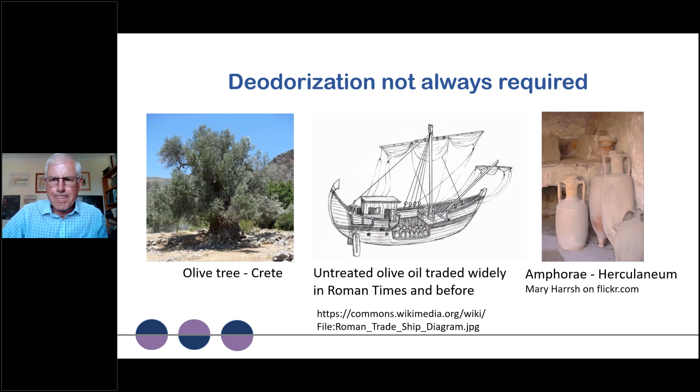Now I see a question here, deodorizing without degumming. I think what I'd say about deodorizing without degumming is really you've got to get the phosphorus level of the oil down to some degree, and if you didn't remove enough phospholipids, phosphorus from the oil, then they would all char inside the deodorizer, and you wouldn't be in good shape at all.

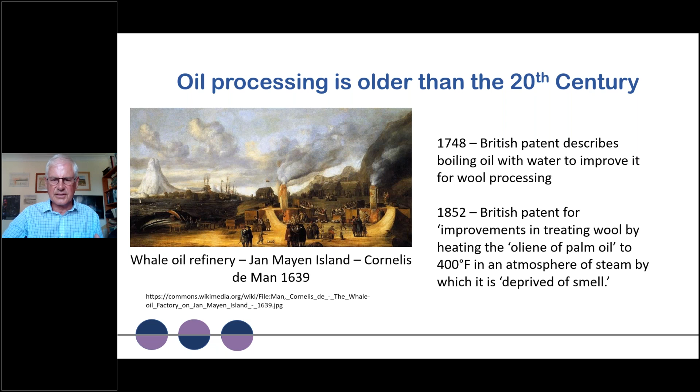And the problem with batch processing like this is that it's not just a very low production rate. You might only do 10 or 20 tons per batch, maybe 3 or 4 batches a day, but it's very, very expensive. You're using a lot of steam injection, there's no heat recovery, and you've got a lot of steam that has to be handled by the vacuum set, so you need a very big vacuum set, very large heating. It's a very inefficient process, but the quality of oil you can produce from this process is surprisingly good.

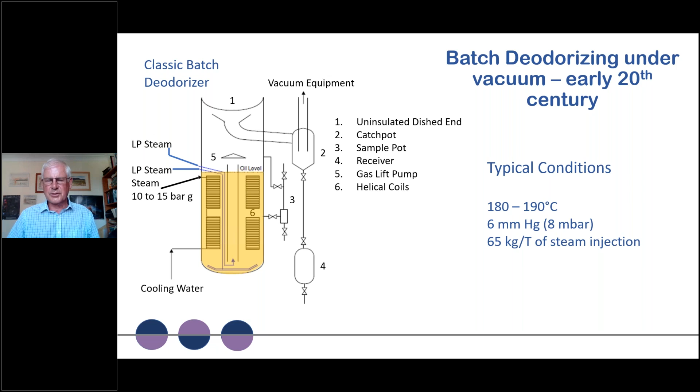So I'm seeing another question coming up in the question box here: would degumming still be necessary?

Well, yes. Generally speaking, you need some level of degumming. If you're starting off with soybean oil, you could easily have 1,000 parts per million of phosphorus in crude soybean oil, and you want to get that down well into single figures before you could even begin to consider deodorizing it. We've often set a limit of 3 parts per million for the phosphorus level in the oil before it goes into the deodorizer. Preferably you'd want lower than that, but I have seen a plant get away with 5 or more. You certainly couldn't come in with 100 -- it wouldn't be possible at all.

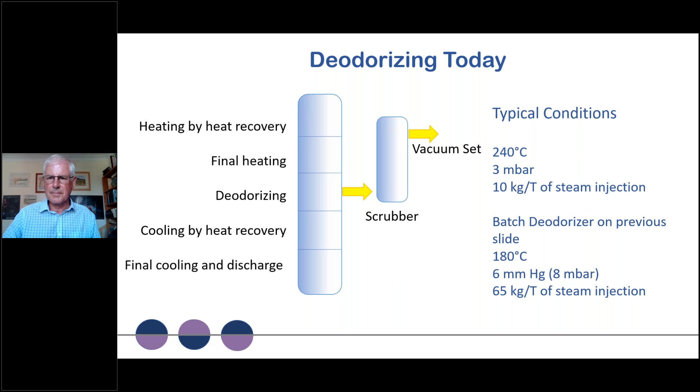Now it's important to understand -- oh, that's another question. Is it not phosphorus removal? No. So yes. Oh, I'm guessing -- oh, I've got more questions. No, degumming was, yeah. So yeah, I'm struggling here to see all of them.

Somebody's asking here, if we used a much higher vacuum, say 0.1 millibar, could we avoid the need to degum the oil? I would say, well, no, I don't think that would be workable. The phospholipids, which effectively are the gums, are not very volatile, so you can't really remove them by evaporation. And there are also other reasons why you wouldn't want to go down to such a low deodorizing pressure, because it would be uneconomical to do that.

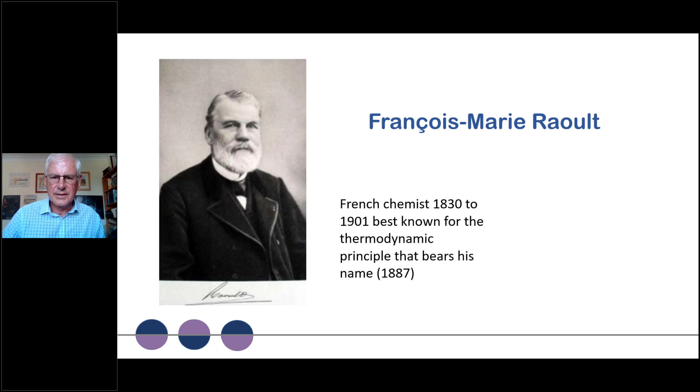One of the things you have to understand about deodorizing is the principle established in 1887 by François-Marie Raoult, the French chemist, often known in English as Raoult's law. Now, basically what that says is, if you've got a substance dissolved in another, then it only exerts a vapor pressure proportional to the concentration of that substance.

And apart from fatty acid, all of the other components present in oil that we're trying to remove are present in very low levels indeed.

Some things we're trying to remove, like glycidyl esters, are present in parts per million. A glycidyl ester at say 1 part per million is only exerting a vapor pressure in the region of 10 to the minus 4 millibars. So we're looking at removing substances with a vapor pressure far below the head pressure that's practical inside the deodorizer.

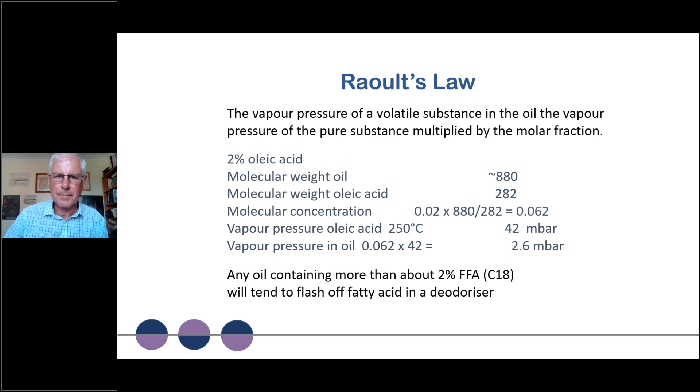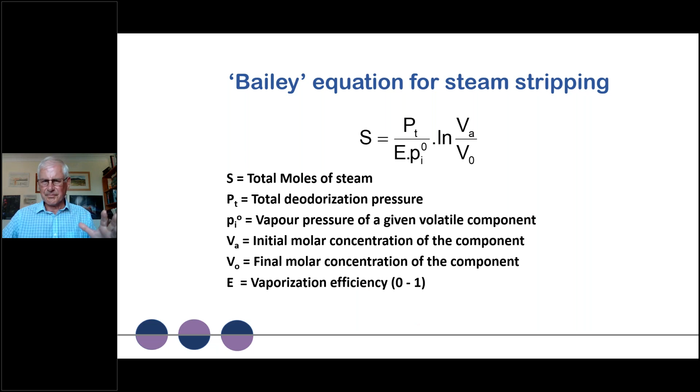I'm not going to go into this in detail, but the upshot is that in practical terms, the Bailey equation means the stripping is a function of the volume of steam used. This is important to remember - it's not just the pressure, and it's not just the mass of steam used, but a combination of those two things that really causes the stripping effect. If you use half the mass at half the pressure, this has about the same effect, as long as you're at constant temperature.

When it comes to stripping substances out of the oil - and more of this later - it's important to remember that the vapor pressure of things like fatty acid and tocopherol, and other substances we're trying to remove, approximately doubles for every 15 to 20 degrees C rise in temperature. So if we increase the temperature by 15 or 20 degrees, the steam required to strip the volatile substances out of the oil is cut by half.

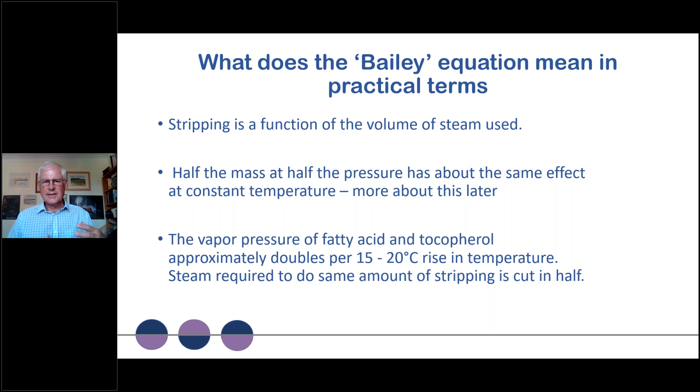From that point of view, we want to operate the process at as high a temperature as possible. But if we go too high, we'll start creating what are regarded as contaminants, such as trans fatty acids and glycidyl esters, which we want to avoid. So there has to be a compromise between these two effects.

It's instructive to look at the Votator deodorizer that was popular between the 1940s and the 1980s, also invented by the Mr. Bailey we heard about earlier. It basically consists of a series of batch deodorizers, one on top of the other, used for heating, deodorization, and water cooling. The oil sits in this box, known as a tray. There are pipes in the bottom with holes, and steam comes out of those holes, deodorizing the oil. Then it falls into this cooling tray and is cooled before being discharged.

How this used to work: you typically had a deodorizing time of around 60 minutes, a temperature of at least 250 degrees Celsius, 8 millibar, and 30 kilograms of steam per ton of oil.

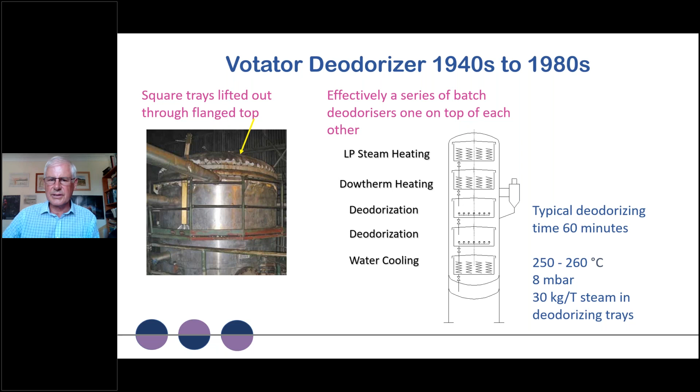Then in the 1970s, Votator introduced what they call the mammoth pump, a popular concept in deodorizing today - there's many different versions of it, also known as a gas lift pump. What happens here is there's a steam chest, a box with steam inside, with holes in the side. Steam comes out of these holes, rises up this tube, and oil rushes in to take the place of the steam. You get a mixture of steam and oil rushing up, hitting the deflector plate and getting deflected back into the oil, while the steam rises up, taking away the volatile material.

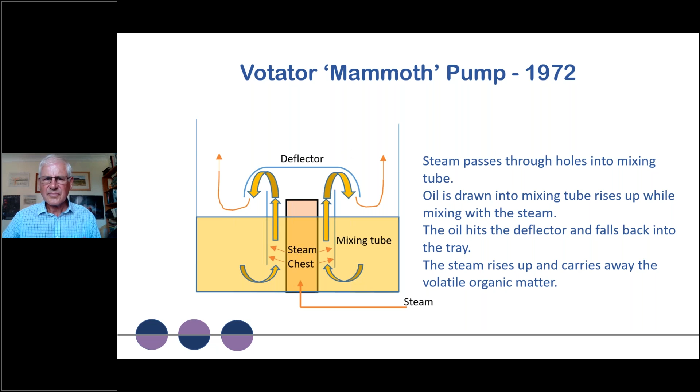I wondered for years whether Votator had actually invented the term mammoth pump, but it seems they certainly didn't. The mammoth pump was a term used for an airlift pump that was used to draw water out of mines, and the invention is said to date back to 1797. Here's a newspaper article dating from 1906 where the term mammoth pump is clearly used, so certainly Votator didn't invent it.

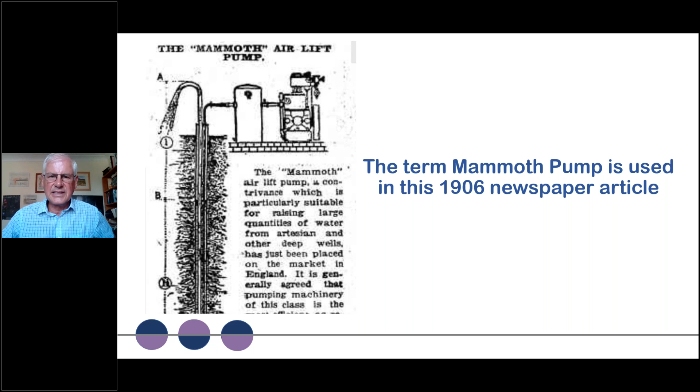But what we see here is that if you introduce the mammoth pump into the Votator deodorizer, this is what they did. Instead of 60 minutes that they had with just the pipes with holes in, they've got one deodorizing tray operating on a 15 to 20 minute cycle.

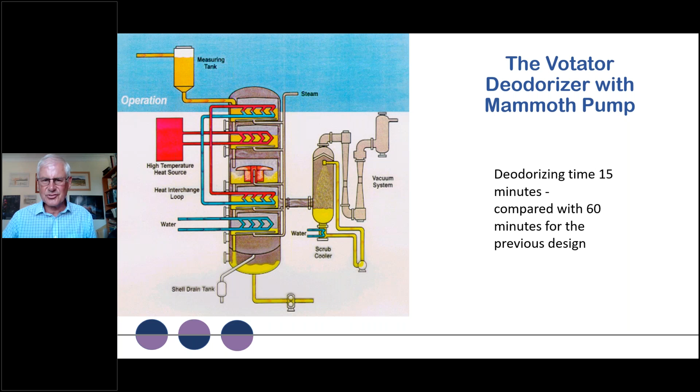So why is that? Now, I thought for years, and maybe you think too, that the mammoth pump is more efficient at mixing steam with the oil than just bubbling steam in through some pipes. But strangely enough, that doesn't seem to be the case.

If you look at the Votator design, and later designs that came along, like the Smet Unistock and the Kirschfeld deodorizer where you had just steam pipes involved, or you look at other designs which use mainly mammoth pumps, the way in which steam is mixed into the oil under industrial conditions, at least, and you may get a different result in the lab, this vaporization efficiency is virtually the same however you mix the steam into the oil.

And to me, that seems unlikely. But when I've looked into this and done some measurements in the field, and when people have gone into the lab and tried it as well, it seems that is true.

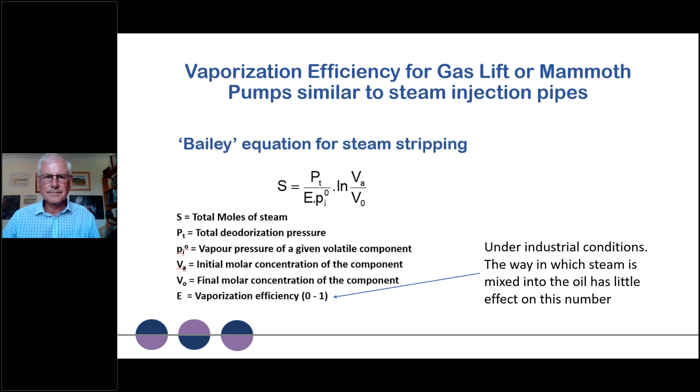So what is it about mammoth pumps that make them so desirable? What it means is, if you put 30 kilograms a ton of steam into the oil in a mammoth pump, you can get all the steam into the oil in only 15 minutes. Because you've got this huge surging oil coming up, but it's immediately deflected back, so all of the impact of the oil going upwards is deflected back downwards.

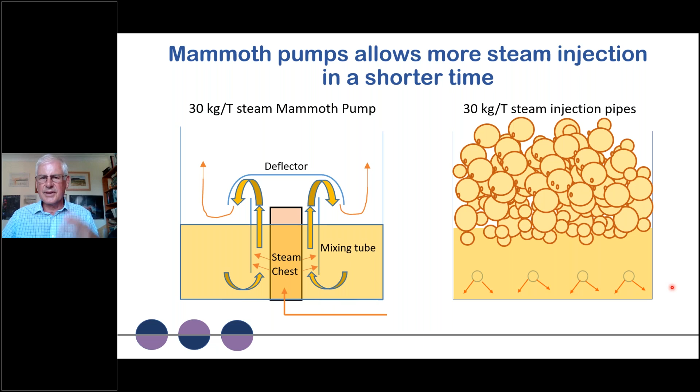But if you put the same amount of steam into a tray with steam injection pipes, it just all bubbles up and overflows. This deodorizer had square boxes inside a cylindrical column, so it would actually fall down to the bottom of the column, and you'd have a terrible mess.

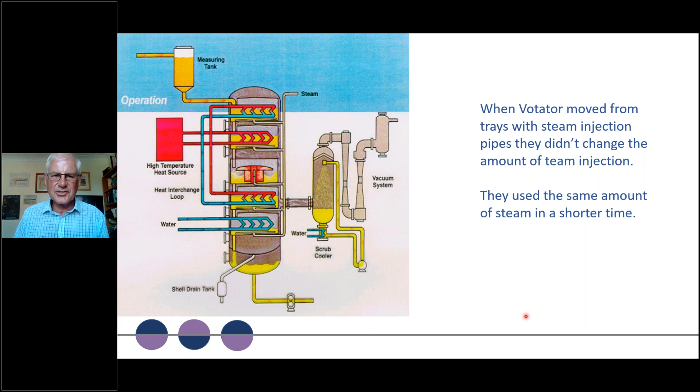So when Votator moved from trays with steam injection pipes, or sparge pipes as we sometimes call them, they didn't change the amount of steam they were putting in. They just used the same amount of steam, but in a shorter time.

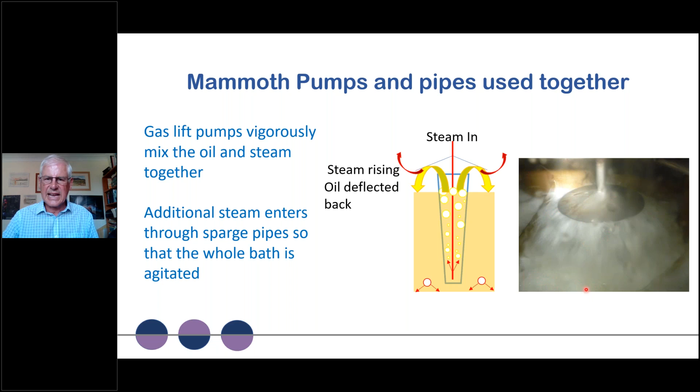And what you sometimes see today is mammoth pumps and sparge pipes, injection pipes, used together. This is a picture showing it happening. There's the steam coming in. This is the hat or deflector plate. Here's the oil being deflected off the top of the hat, and this is oil being agitated by these pipes below.

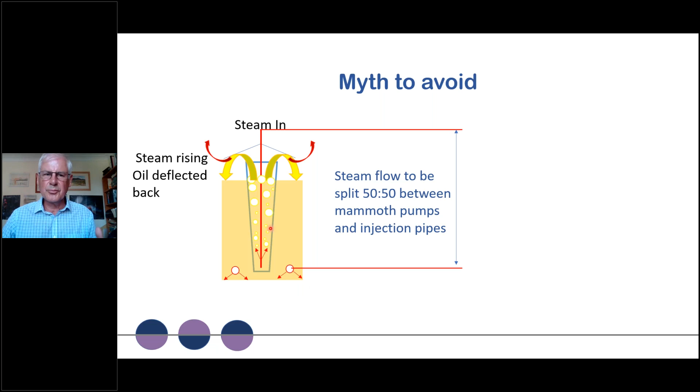Now here's a myth that I think you must avoid. It's often been said that if you have this arrangement, the steam should be split 50-50 between the mammoth pump and the injection pipes. But we've only just been hearing that a mammoth pump can put more steam into the oil than an injection pipe. So it doesn't make any sense to make these two the same. You can put far more steam into here than you can into here.

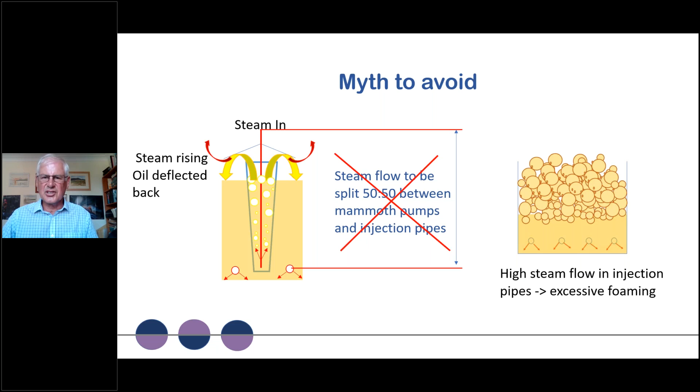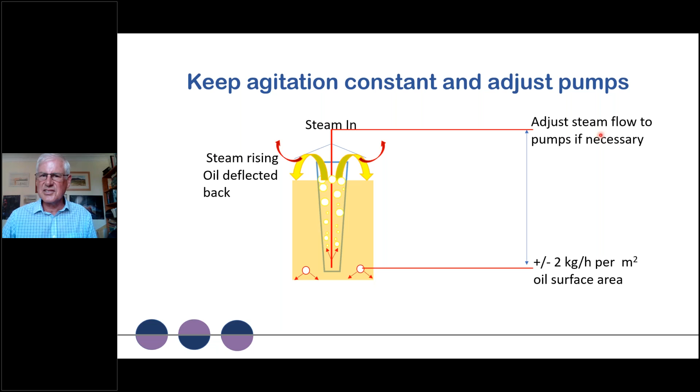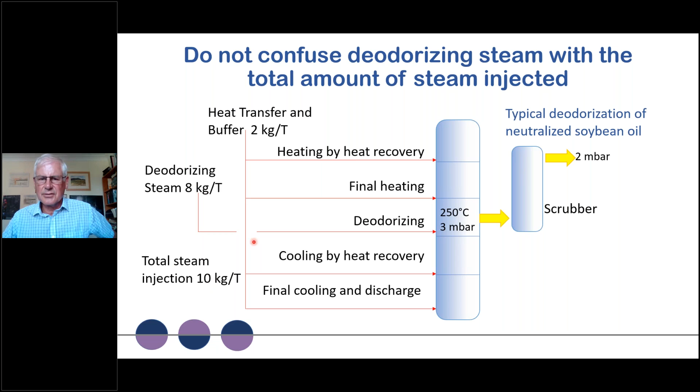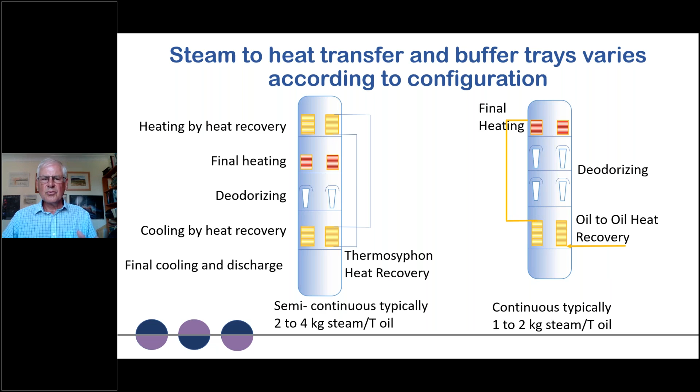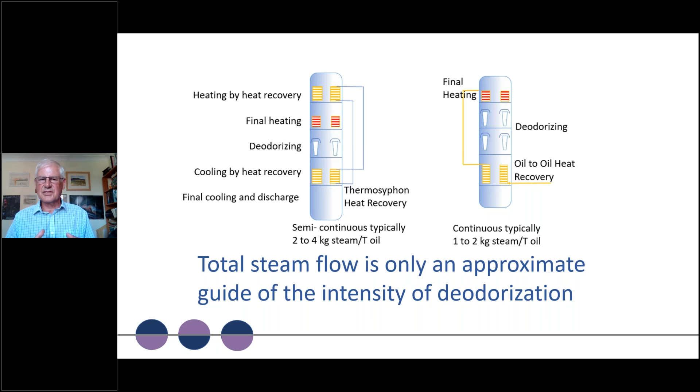Different types of deodorizer require different amounts of steam into the non-deodorizing tray. If you have a semi-continuous deodorizer, such as the Votator or one of the more recent designs, you easily have 2 to 4 kilos of steam per ton of oil. In a continuous deodorizer, where heat recovery is more compact, perhaps 1 to 2 kilograms a ton. So the total steam flow to a deodorizer is only an approximate guide to the intensity of deodorization. You really have to also consider how much steam is entering just the deodorizing trays.

Because if you're putting more steam in than you need to, that steam you could be using for deodorizing. And if, by adjusting the rate of steam to all your non-deodorizing trays, you could get 10% more steam into the deodorizing trays, then you could do 10% more deodorizing, and that could be really very significant.

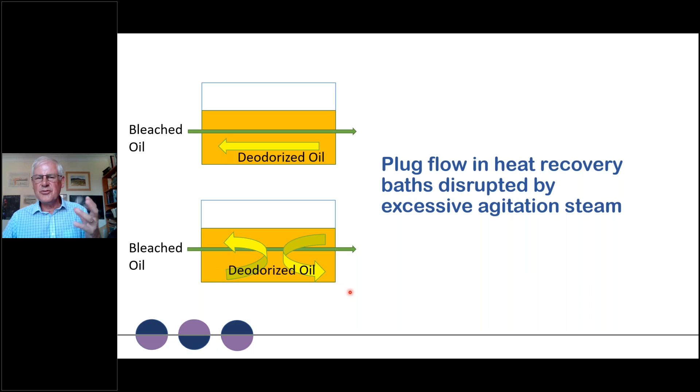Also, it's worth remembering that if you have a continuous deodorizer with bleached oil flowing in pipes and deodorized oil flowing in baths, if you put too much agitation steam into that system, you can disrupt the plug flow. So instead of a plug flow bath, you make it a mixed bath, and then you don't get any improvement in the heat recovery. In fact, it drags the heat recovery down. So by adding more steam, you've actually pulled down the heat recovery. So definitely something to avoid.

Deodorized lecithin using steam, of course. Well, yeah, perhaps we'll cover the matter of lecithin later. Basically, if you dry lecithin, some of the impurities are carried away with the steam as part of a drying process. So that's really something different—you're certainly not deodorizing lecithin in anything like the equipment we're talking about here.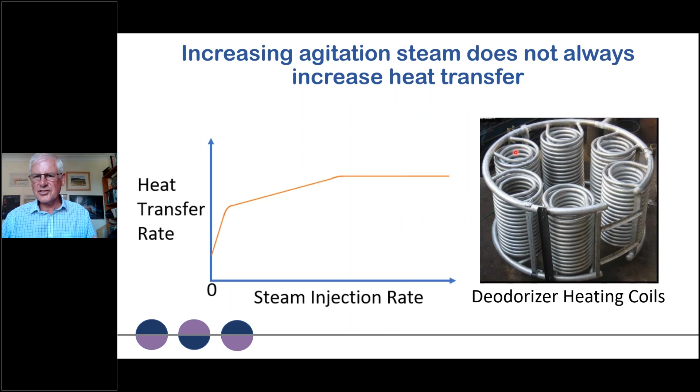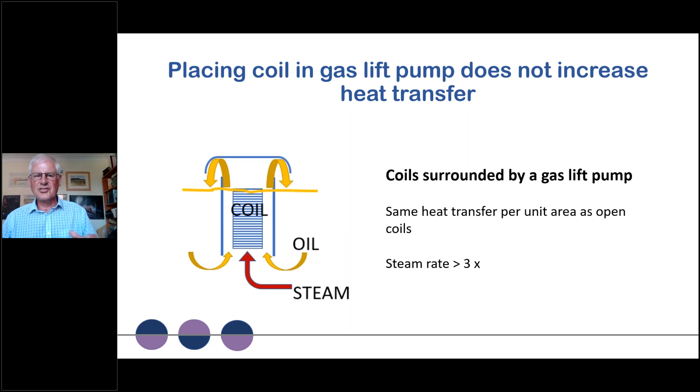So what's happening here is that the oil is being dragged through across this coil, but I have had the opportunity to measure the heat transfer rate in this kind of system, and it's virtually the same as if you had the coils just in an open bath with a sparge ring below them. So this looks encouraging, and it's hard to believe it doesn't work better than it does, but certainly the evidence I've seen suggests it's no better than just having open coils. But we've used 3 times the steam rate to do it, which is unfortunate.

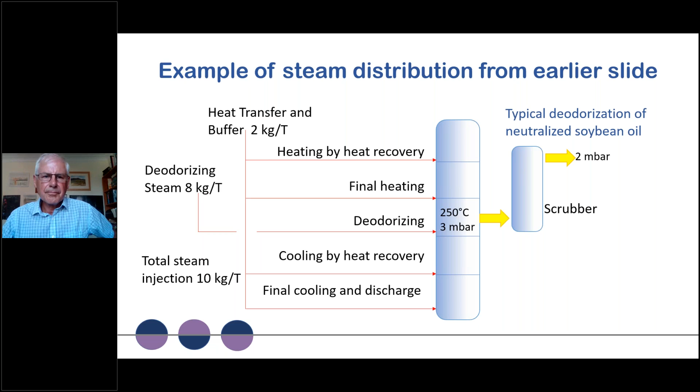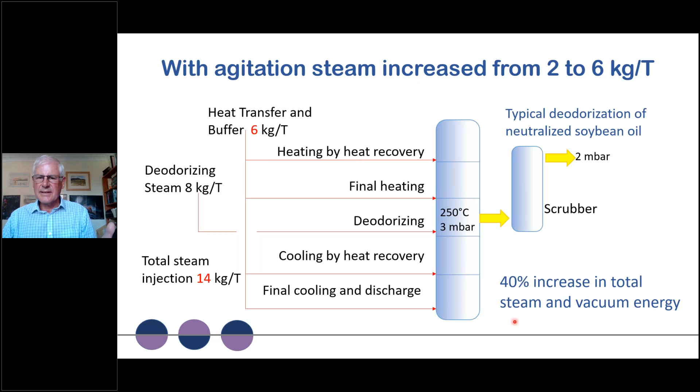So if you look at the example we had earlier, with 2 kilograms a ton of steam in the non-deodorizing trays and 8 kilograms of steam in the deodorizing trays, then if we say, well, with this coil in the gas lift pump, we need 6 kilograms a ton of steam for the heat transfer and buffer trays, the total steam goes up to 14 kilograms a ton. So we've needed a 40% increase in the energy required for the total steam and the vacuum energy.

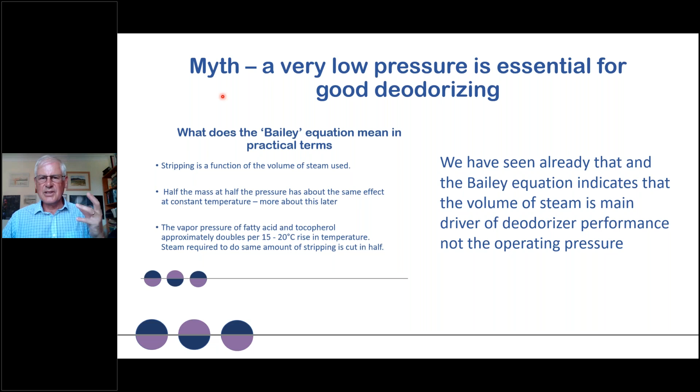Now, I'm going to say this is a myth, and not everyone will agree with me here, so I have to tread carefully. You don't actually need a very low pressure to get good deodorizing. It's a myth that a very low deodorizing pressure is essential for good deodorizing. The Bailey equation has already told us that the volume of steam, rather than the operating pressure, is essential.

In fact, even in the early 20th century, we can see that sometimes deodorization was done under atmospheric pressure, and theoretically that's okay, but practically it's hopeless because it's massively expensive and you need vast quantities of steam compared to doing it under vacuum. The Bailey equation says yes, you can deodorize at atmospheric pressure, but we don't recommend it.

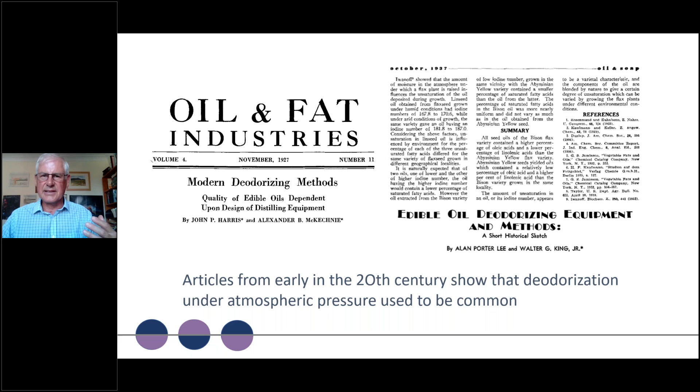So the message here—another question's appeared. No, I don't see it here.

Mammoth pumps require higher bed heights, which diminish the efficiency of sparging steam. What does that mean? Is it more efficient to use lower bed heights with only sparging steam? You might think so, and intuitively you'd think that's the case—that a shallow deodorizing tray would be more efficient than a very deep bed with the Mammoth pump in it. But when you actually try it, maybe with very sensitive measurements you'd see a difference, but in practical terms in industry, I can't see any difference that creates.

So what we have here is 3 millibar with 10 kilograms of steam. I'm going to say that in terms of the stripping of the oil and the quality of the oil you're going to get, you do just as well if you had about 20 kilograms per ton of steam. And in the 80s and 90s, nobody thought there was any problem with that at all.

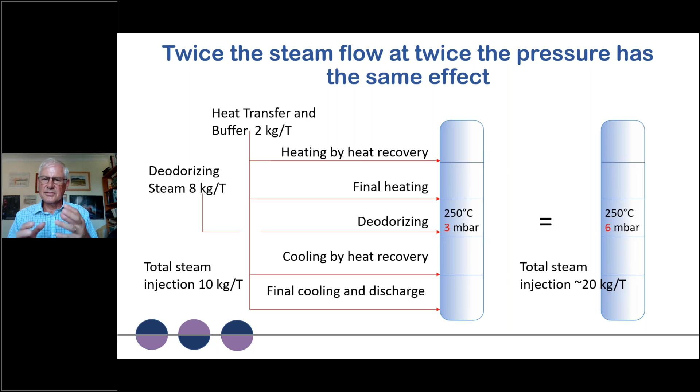But on the other hand, there's an argument that steam actually reacts with coloring bodies in the oil. Some people have said this, so having a higher mass flow rate of steam helps to reduce color. There's also an issue if you go very, very low in pressure, then condensing the volatile substances in the scrubber starts to become an issue.

But certainly you will always get at least some small degree of hydrolyzation, creation of fatty acid in the deodorizer. You have to try to minimize that by using the lowest possible temperature, making sure the steam is very dry when it goes in, because introducing droplets of water will certainly have a negative effect.

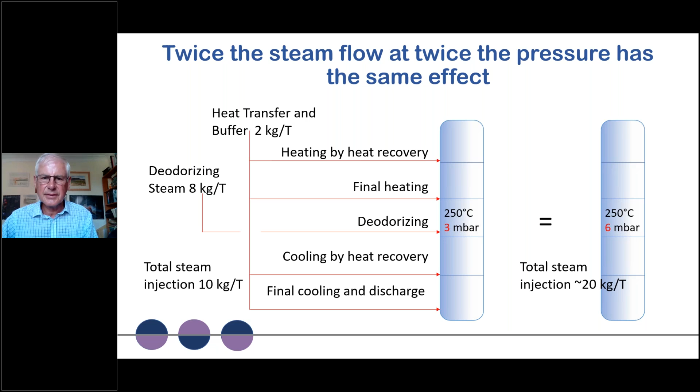Okay, shall I carry on? Got a lot of questions in here. I'm only getting a sort of preview, not seeing them very easily here. Pull out the box a little bit.

Is there any chance of more oil loss with higher temperature? Yeah, I think that's true.

You're more likely to create fatty acid and have that excess fatty acid stripped off at higher temperatures. And with higher temperatures you can generally increase the losses. So if you do more deodorizing, put more steam in, more temperature, more vacuum than you need, that's going to lead to more losses, either from fatty acid or from other things you didn't want to remove.

So if at the end of the day, instead of the distillate being 0.3% of the oil flow, it's 0.4%, that's 0.1% you aren't selling as oil. Maybe you can sell it as distillate, but whether you're getting enough extra margin out of that is perhaps questionable. So yeah, it is all a compromise.

You want the highest temperature possible that will reduce the steam flow and cut down the color, because a high temperature will reduce the oil color. So it's all a compromise, unfortunately, and there's no absolutely final result where you could say that's the perfect temperature. It depends on what your priorities are and where you might get to.

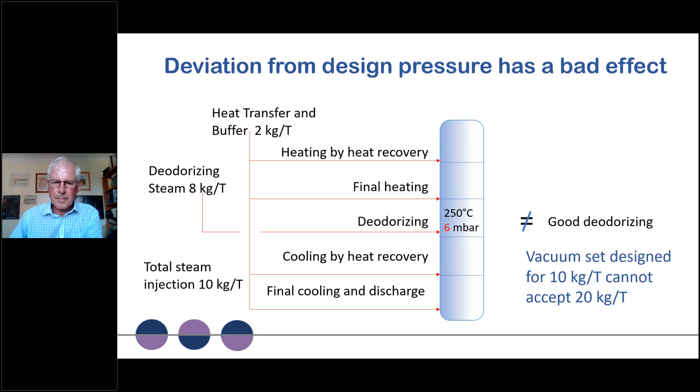Here are some principles I want to summarize: if you have a rise in pressure above the design level, then you're going to get an adverse effect on deodorizer performance. But if you have a higher design pressure combined with a proportionally higher steam flow, then you'll get the same stripping performance. And what pressure you choose is driven by the economics of the process.

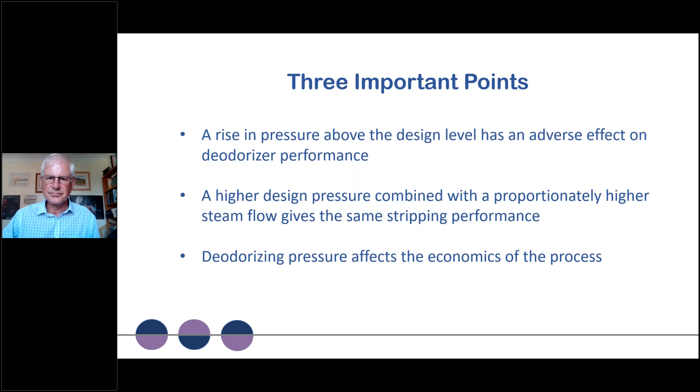Now, in deodorization, there are 2 commonly used forms of the vacuum system. There are vacuum systems based on steam jet ejectors with intermediate condensers, and these condensers can use either cooling tower or chilled water. There are also sublimating systems, where the steam freezes on the outside of tubes, which are maintained at around -30 degrees Celsius, usually by liquid ammonia. Then you have a small ejector set, or sometimes some dry pumps, to remove the rest of the non-condensables.

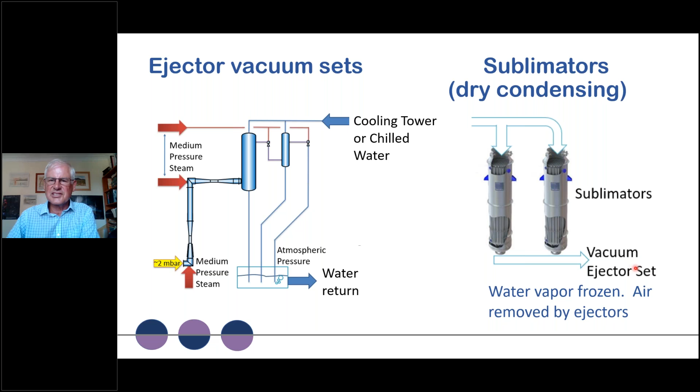The ideal deodorizer operating pressure is around 3 millibar, but if you go a little bit either side of that, it doesn't really make very much difference.

It's important to remember that, whatever pressure you choose, the sublimator is always going to be the most economical in terms of running costs.

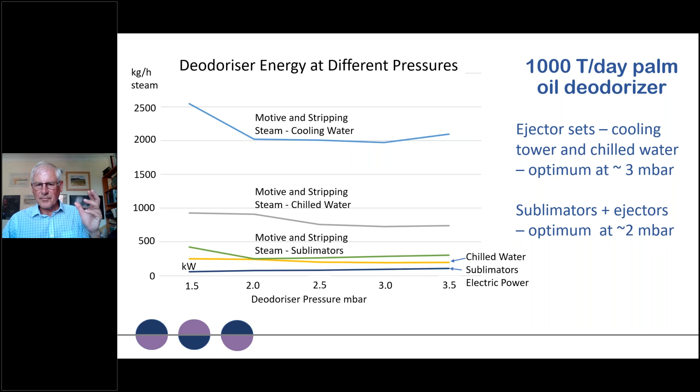So really, what I'd like to say is that the oil quality isn't directly linked to the operating pressure, so there's no need to go below the most economical operating pressure. In the case of ejectors, around 3 millibar. In the case of sublimators, around 2 millibar.

The most important reason for using sublimators instead of ejector sets is an economic reason. It's much more economical in terms of running costs. Sublimators are more expensive to buy, but in the long run, when we talk about years now, they're much more economical.

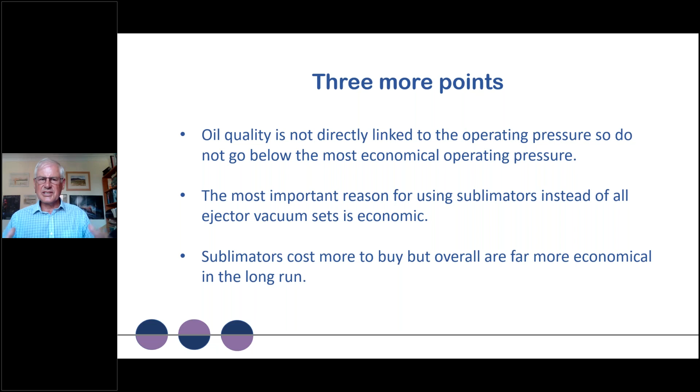So just a quick summary, and then we can take some more questions. First of all, perhaps we ought to remember that oil processing isn't a new industry. It goes back hundreds, maybe even thousands of years.

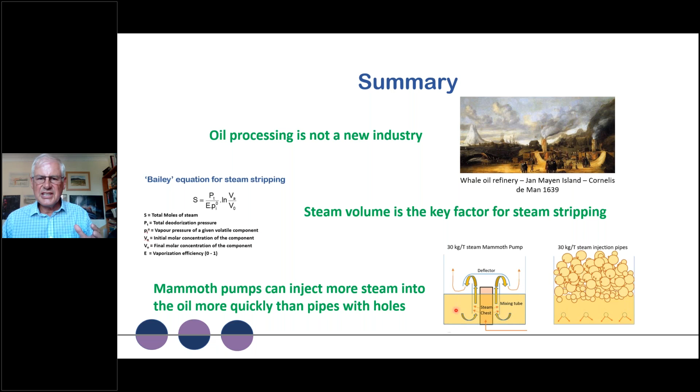Steam volume is the key factor for steam stripping, and mammoth pumps can inject more steam into the oil than steam injection pipes. The total amount of steam that we put into a deodorizer varies according to the deodorizer configuration, because some types of deodorizers require more steam than others for the non-deodorizing trays.

A low deodorizing pressure isn't essential for good deodorizing, but it's useful to select a low operating pressure because that's the most economical thing to do. And depending on the type of vacuum system, that most economical pressure varies between about 2 and 3 millibar.

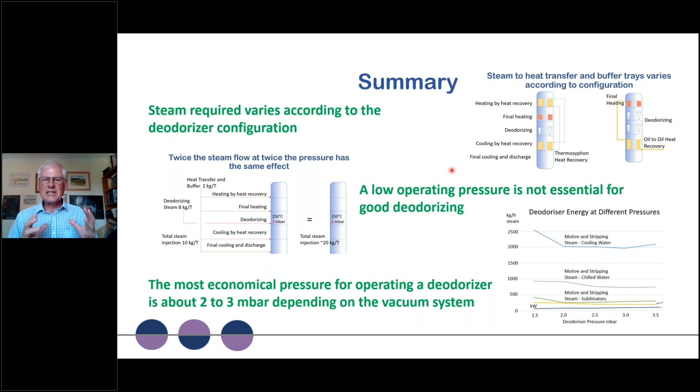So that's all, thank you very much. And if there's more questions, or a few that I haven't answered yet, then please fire away.